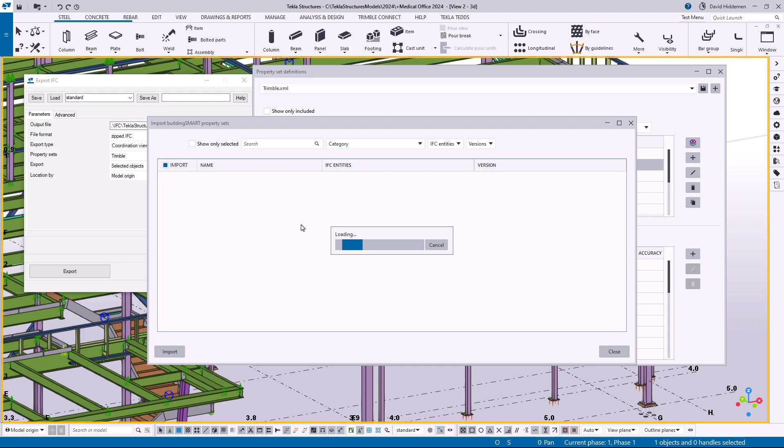The other thing I want to mention as far as what's new is access to all of your buildingSMART standard IFC properties. If you click on this buildingSMART icon here, you'll see a list of all the different standard IFC formats from buildingSMART that you can import into your property sets and include with the data you're sending out to Trimble Connect or wherever.

I want to give a real quick run through on how to add a custom property set and include custom data with it. One example came to mind based on a recent conversation, and looking at the default property sets, you can see these are all individual element hierarchy objects—like a bolt or a part—but not an assembly group. I had a conversation recently with a fabricator that does their own erection, and they were asking how they can see that sort of data. They want to see assembly weight, overall length, overall height, and overall width. So this is how someone who wants that sort of data might add it.

What I'm going to do is come over here and click the plus sign. By the way, some of these elements are not checked, so those won't currently be included, but I'll go ahead and hit the plus sign to add a new one. I'm going to call this new property set 'assembly properties,' and in the description you can give it any sort of description you want—I'll put information about overall assembly.

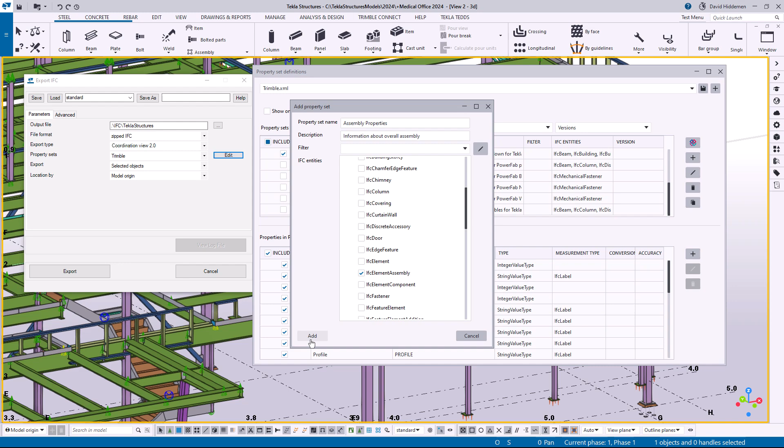Again, we can create a filter, but I'm not going to worry about that today. Then, what object types in the IFC do I want this data to affect, where do I want it seen? Right now we've already got stuff included on the IFC beam, column, or fastener. So I'm going to scroll down and look for the IFC element assembly—that's the assembly-level information I'm trying to add properties to. I'll go ahead and click add, and now I've got this new property set called assembly properties with information about the overall assembly.

Down here, I can start adding the individual properties I want to see. I'll click the plus sign and start adding things like the piece mark—that's probably pretty important—so I'll add assembly POS. I can type in information here, or select specific hierarchies of what I want. I'll select the assembly level information since that's what I want to focus on, then search. I could scroll down, but I'll type in POS, and I can see there's the assembly position I want to add. So I'll click add.

And now that's been added down below, but I'm not done yet. I'm going to add weight here, because that's something pretty important for an erector and also important for a shop trying to plan shipping this stuff. So again, I'll just come in here and start searching, and there we can see the assembly weight. I'll go ahead and add that information.

Now here's something I did a little bit of tinkering with. Because I'm going to be sending this data to Trimble Connect, I'm not worried about changing the conversion factor down here. Trimble Connect has settings to automatically convert the units for weight and length, so I'm not going to bother changing this.

Now, depending on the software you're sending it to, it may not have that option. So you can come in here and set things like kilograms, tons, or pounds. You can set that, but I found better results with Trimble Connect by just leaving it as the default metric export and then letting Trimble Connect give me the correct conversion.

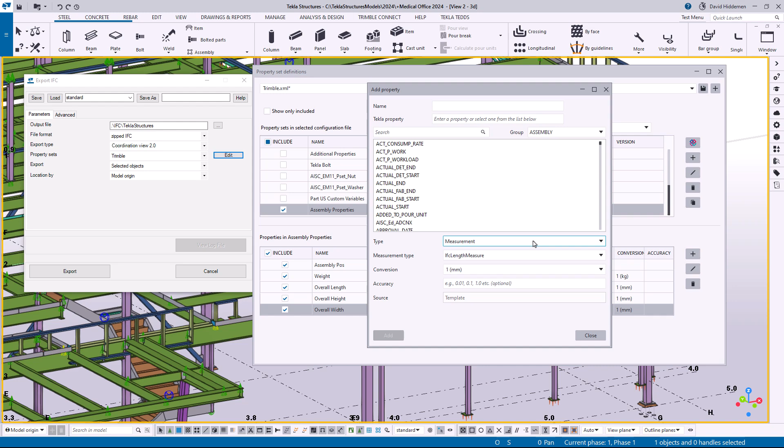So I'm done adding things, I'll close this. Now here I can either just save over the default Trimble XML, or I could give this a custom name. I'll call this Dave's Custom Settings or Exports maybe, and we'll go ahead and save that file. Now that does initially get saved into the local model folder—this is not saving to a system path or anything like that. You can then take that XML file and copy it into a firm or project folder, or your system folders, if you wanted to.

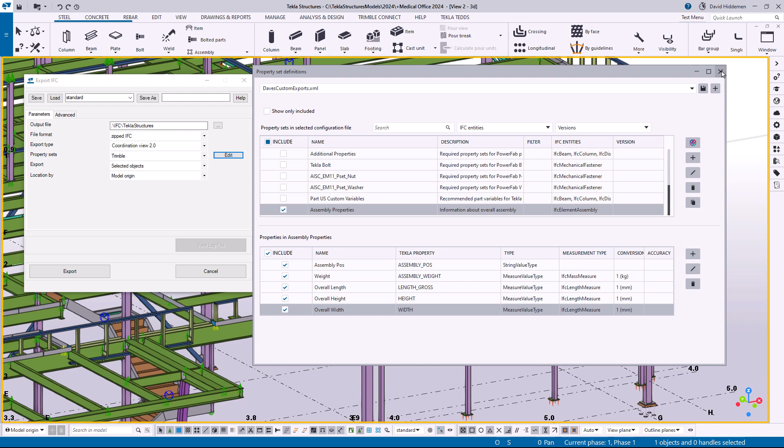All right, so we'll go ahead and close this property set definition, and I'm just going to run a very simple export of something like this beam right here. So we don't need to export the entire model, we're just trying to prove a point here. I'll go ahead and hit export, and then let's open up the model folder and go to, it's over on my other screen, of course. I'm just going to double click on the IFC file and let it open up in Trimble Connect here.

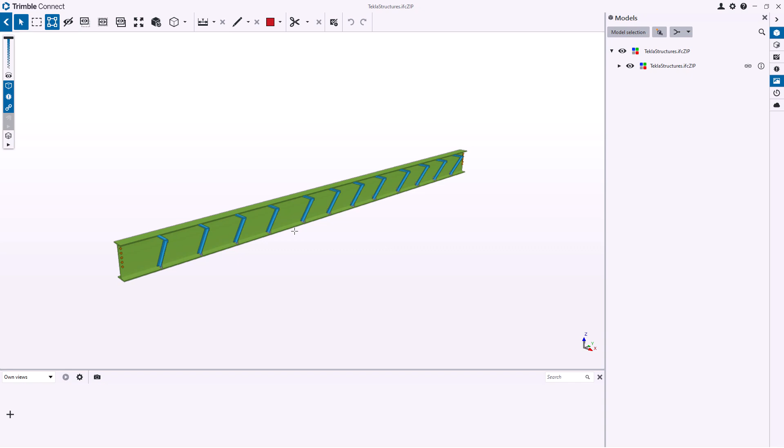Okay, so here we've got the IFC file for that beam, and I have the Select Assemblies button pressed down here, so we're going to grab this beam assembly and pull up its properties. And over here on the right, you can see the assembly properties that I specifically chose to include: the assembly position, the weight, the overall length, overall height, and overall width. And again, my Trimble Connect is already set up for the units that I want.

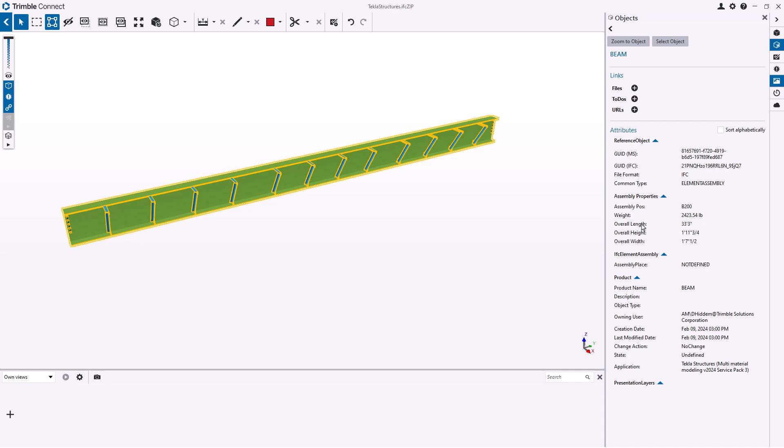So if you wanted to change this out, maybe I want to do pounds instead—give it a second to refresh itself there. Now it's gone ahead and updated the weight. So you can try the export settings to include the right conversion right away, but in Trimble Connect, I'm finding it easier in my tests to just leave it as the metric values and let Trimble Connect convert it.

So in any case, I hope you found this video helpful. This is a new feature in Tekla Structures 2024, there to make it a little bit easier to customize this data, a little bit easier to understand what's going to be included, and also give higher levels of control about what is being sent to what types of objects. So let us know what you think about this new development.